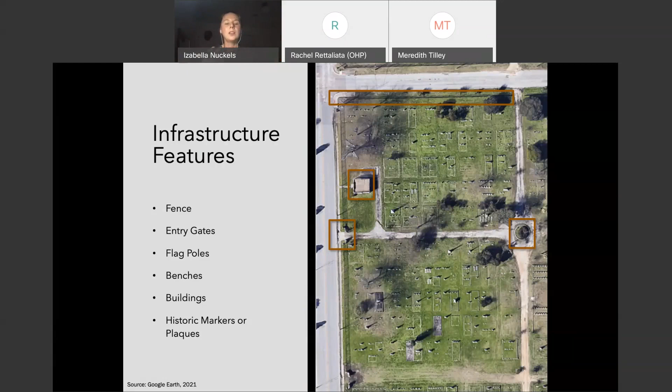And then kind of within the site, you'll have lots. So cemeteries may be organized informally, where you just have single graves. They may also be platted and organized in lots, like this cemetery is. Those lots may include members of a single family. They may include members of specific organizations. They may also be single graves.

Many lots have curbing around them, so that's basically just like a street curb. It's kind of a low fence. It's often made out of some kind of masonry or concrete. It may have decorative cornerstones or an entry step. There may be some kind of inscription describing who's in there, if it's a family or an organization. There are so many different types of lots, and we'll look at pictures of a couple of them.

If you look towards the bottom of the screen, there are a couple of lots that were totally covered with concrete, which is not uncommon either. They could also be fenced with cast iron or wrought iron fences. They may have historically been fenced with wood fencing that may no longer be there just due to time. So there are kind of so many different characteristics that you can find at the lots as well.

And then the lot also may have some ornamental features. So this is a page from a Sears catalog from 1904 that is describing a couple of the lot features that you can purchase: benches and urns that you can put in your family lot. This is an actual really nice faux bois ornamental bench at City Cemetery number 3 in San Antonio, and the whole lot has this really interesting kind of applied art, decorative art theme to it.

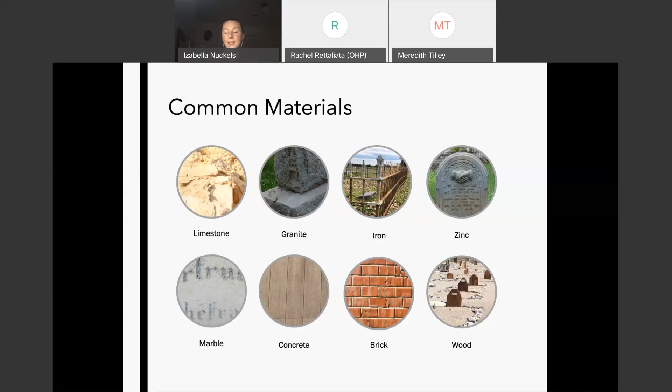So because I'm a materials person and I teach about materials, we're going to just go back to the basics and talk about what rock is. So rock is made up of minerals. So it's these things that are naturally formed in our earth. They're made up of one or more minerals. Minerals are these inorganic, naturally forming, really spectacular materials found in nature. Stone is a word that we use in conversation generally to talk about rocks that have been processed, or sometimes we call it dressed.

There are three main types of rocks. So you have sedimentary rocks. So these have been formed by compacted sedimentary deposits. They're usually found at kind of the bottom of ancient oceans. They sometimes have fossils because they're compacted deposits of crustaceans and ancient coral reefs. So this is our limestone and our sandstone. It tends to be very porous, but very easy to carve and abundant in central Texas.

Next up, you'll have metamorphic rocks. These are your marbles and your slates. And these are actually sedimentary rocks that have been recrystallized through elevated temperature or pressure. So they have similar qualities to sedimentary rocks, but are a little bit harder. And then lastly, you'll have your igneous rocks. So that's our granites and basalts and gabbro, and these were formed from magma that cools and solidifies.

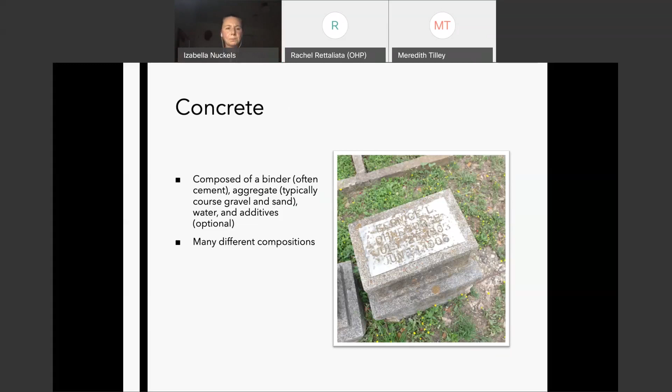So I mentioned zinc monuments. These were quote unquote called bronze monuments. That's how they were marketed. They were sandblasted to look like stone. As I said, zinc content is relatively high, so that makes the monument pretty stable. You'll see some of these when they get really tall, sometimes the seams will fail and they'll kind of start to sag a little bit because they're hollow on the inside. But in general, a lot of them are in really great condition, and the bases are usually zinc as well.

So when we're talking about these monuments, we're talking about kind of all of these different materials in the cemetery. It's important to kind of understand the basic construction. And a lot of times, different elements of monuments historically were made out of different materials. And so this kind of lends itself to different types of deterioration. It also may lend itself to specific treatments.

So, very generally, cemetery monuments have a die. So that's the kind of vertical piece that has inscriptions on it. And then it usually has a base of some sort. Sometimes dies are set directly in the ground, but often they're on a base. There also may be some kind of foundation. It's usually concrete that's either adhered to the base or kind of is a platform that's set in the ground, and then the base is set on top of it. So the die could be made out of any of those materials that we just talked about.

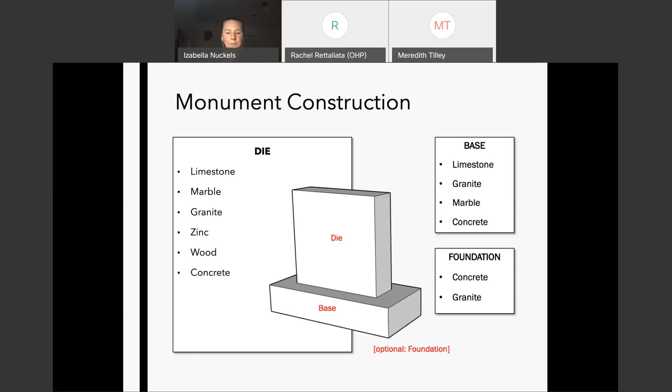We're looking into the construction. So you may have some monuments that are set directly in the ground. Footstones a lot of times are set directly in the ground, although they sometimes have bases. You may have a die on base. This is common with newer granite monuments where you literally have a big die that is set on a base, and you usually have some kind of mortar or caulking between the two to adhere them.

Historically, there were a number of monuments that were made with a pin between the base and the die. This helped with movement in the absence of having an adhesive of sorts in between. These pins historically were made out of some iron-containing material, so many of them have corroded because of moisture getting into that area, and they've corroded to the point where they've snapped or really failed.

And then you also may have a die-in socket, so the base may have a hole cut out in it, and your die fits right into that socket. It's a little slot. There's usually a perimeter around, and it was sometimes set in a lime-based mortar. That's a very soft mortar to keep it from moving around. Sometimes there were pins inside the socket that went into the die as well.

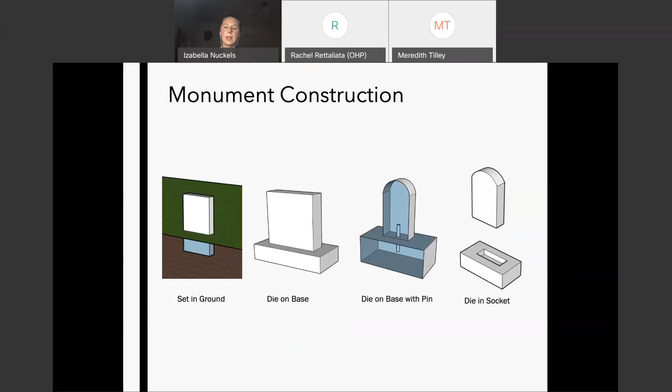And then, as I mentioned, there are so many different monuments in cemeteries. You'll have bedsteads, you'll have slabs, you might have mausoleums that are constructed like buildings. So there's a variety of different forms that you'll find, but those basic principles of stacking die on base, the pins, and the sockets are really the building blocks of construction in most cemetery monuments.

And then lastly, you'll have the inscription, and this also informs the type of treatment approach that you might have. This is an advertisement for the types of inscription that you can have from a 1906 Sears catalog. So you can have your sunken inscription that's incised into the monument. You can have raised inscriptions, and these are two examples from monuments in the City of San Antonio cemeteries as well.

And then I just want to reiterate that dies and bases were often made of different materials. One thing to remember about most building materials, but limestone and marble in particular, is that over the years, these materials move. They don't move a lot, but they move a little bit. As water goes in and moves out, these will expand and contract minute amounts. And so if you set them in a socket with Portland cement, in a very tight base, they can start cracking and not have the flexibility that they need. So you always want to use a lime mortar.

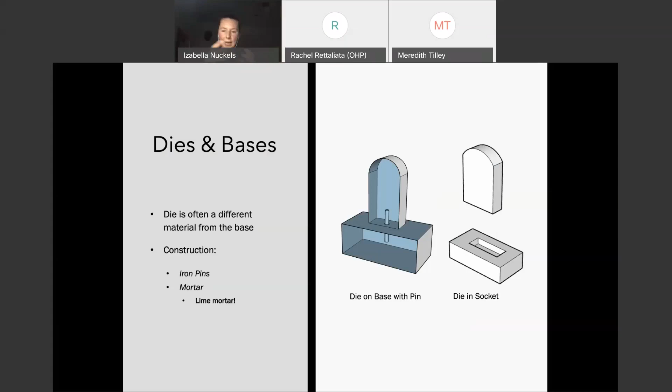If you have a corroded iron pin, you can replace those with an inert material like a fiberglass pin or a threaded nylon pin, something that's appropriate for long-term preservation, something that's not going to actively deteriorate in this exterior environment.

Some of our other site materials, of course, are metal fences. This is again from a Sears catalog. A lot of these metal fences around cemetery lots were prefabricated and ordered. They were often cast or wrought iron. They were historically painted, since iron materials corrode when exposed to air and moisture. So they're typically coated in order to keep them stable.

As you can see from the Sears catalog, there are a number of different installation techniques for metal fencing in cemeteries, and it's neat to go through some of these catalogs and see if you can identify where some of the fencing came from before you work on it. Sometimes it'll give you some clues on its construction or some missing elements that you might have.

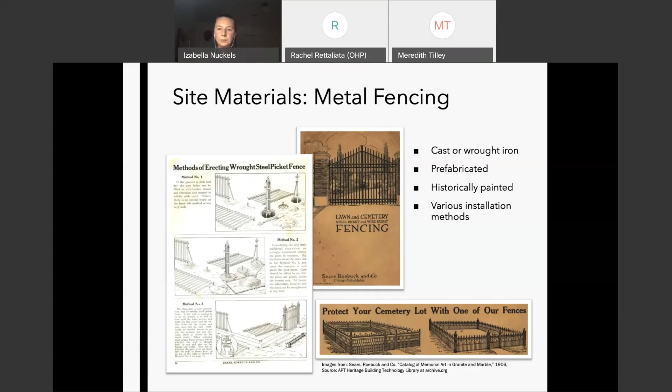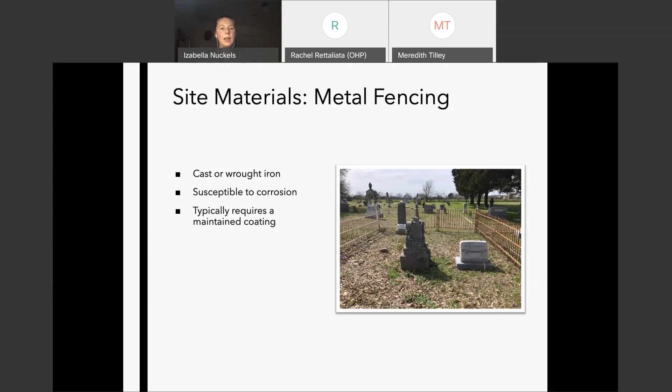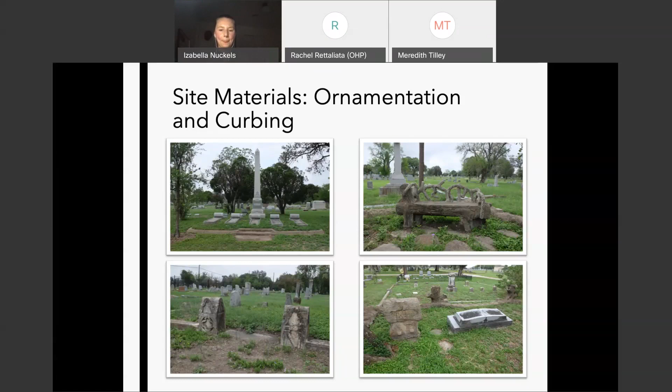So because all these materials are outside all the time, they're exposed to the elements, they're near roads, so they're exposed to pollution, they're around people, so they're exposed to people, there are animals and trees and weather going on. There's all sorts of different conditions that arise, and that's normal. So historic buildings, historic cemeteries, historic sites, historic resources, they don't stay in this like new state. They do require maintenance. That's part of what we do. It's part of how we kind of preserve our collective cultural heritage together.

So corrosion, as I mentioned, that's one type of deterioration that affects our metal materials. A lot of materials in cemeteries, including your fences and your pins, have iron-containing elements. So most of these elements are cast or wrought iron, which are alloys. An alloy is two or more different metals, or metal and a non-metal. And these alloys contain iron ore, which in nature, when you find iron ore, it's a very stable metal. But when you create an alloy of it, it actually is going through this process called oxidation when it's exposed to air and moisture, and it's actually trying to revert back to its natural stable state. So that's what this poor little iron ore is doing when it's corroding. It's just trying to revert back to its natural state, and it's just destabilizing in the process.

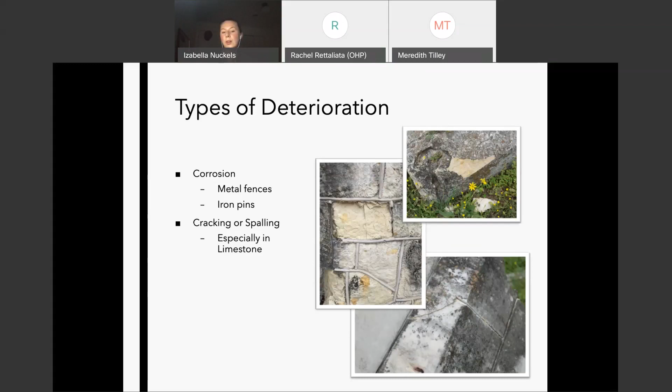Sometimes you'll see it due to human interaction, somebody bumps it, maintenance issues, things of that nature. So there are a number of reasons you may see that, but it's something to look out for when you're approaching any preservation projects.

And then you also might see biological growths. You might see them on the micro level, where you can visually see that color, but you really need a microscope to see what it is. You can see it on the macro level, where with the naked eye you can see this large plant growing. There are thousands of different types of biological growth, algae, lichens, molds. They grow in buildings, they grow in cemeteries, and some cause harm, some don't.

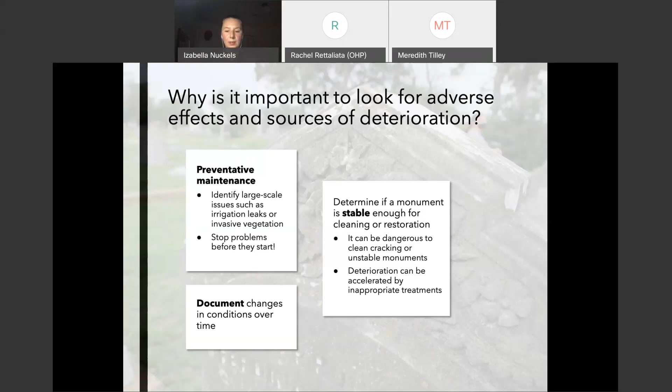So now we're going to talk about some of the best practices for cemetery preservation and how to approach a preservation project in a cemetery. And I was explaining this to Rachel and Meredith when we met, but a lot of cemetery preservation in these projects that we do, it's a lot like painting, where you spend most of the day taping off the room and preparing and picking out colors and doing mock-ups, and you spend a little bit of time painting, and then you take it all down and clean up and do all that.

So a lot of hands-on preservation involves preparation, getting all of your logistics in order. It involves documentation before you do anything, when you're testing product, after you're done doing it. You always want to use the gentlest means possible. So usually you're starting with low pressure water and then working up from there. You always want to use materials and methods that are appropriate for historic materials, historic fabric. So that may involve a little bit of research. It may involve ordering products. So it may take a little bit more time.

Safety should always be a priority when you're working in cemeteries. Cemetery monuments can be extremely heavy. I think that a cubic foot of granite is about 160 some pounds. So you really want to make sure that these monuments, that sometimes are just a die set on a base, are not unstable, and they're not going to hurt you or anyone that you're with.

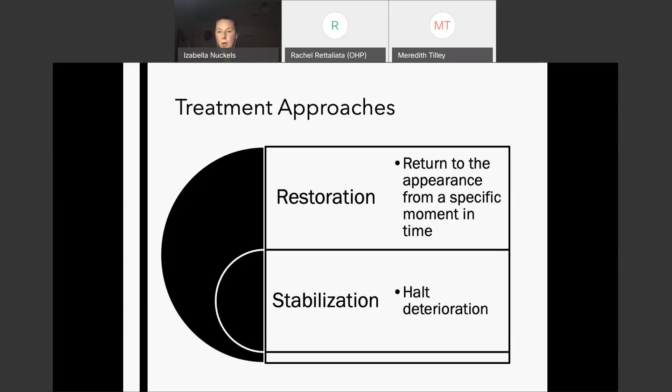So I'm going to go over some different types of restoration treatments, best practices, as well as some stabilization approaches. So some common cemetery monument restoration treatments that you may see are patching or infill. If you have a crack, or you have some kind of opening, this prevents moisture and water from infiltrating into the monument. It helps to stabilize it as well.

You may do adhesive repairs, so there are specific adhesives that are appropriate for different types of historic masonry. These usually have some water permeable qualities, so water can still move through the monument. You may be resetting dies in lime mortar beds in their base sockets. You may be doing more complex restoration, like pinning and casting new decorative elements and really doing a full restoration. So, you can go from those simple resetting dies into sockets to these very complex pinning, casting repairs.

As I mentioned, restoration projects tend to be pretty complex. They are usually multi-step processes. They usually start with cleaning and doing a condition assessment and sort of mapping out your treatment plan. They sometimes involve very simple repairs, but it really depends on the condition of the monument. Regardless, there are some best practices, some reminders for good restoration.

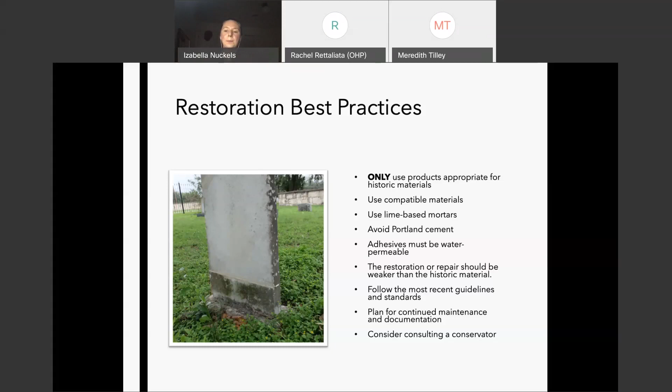And then, what happens if you use incompatible materials? So this is a question I get a lot. It seems easy to go to Home Depot and buy a product off the shelf, and it sometimes looks okay for a little while once you apply it, but there can be issues that arise over time. And, again, this is the image of that limestone that had Portland cement mortar applied around it that was just too hard, so the limestone is just falling away.

It was set in a limestone base with Portland cement, and likely when it moved a little bit due to natural ground movement that happens, it hit kind of an angle at which the die didn't have any kind of room to move, and so it snapped.

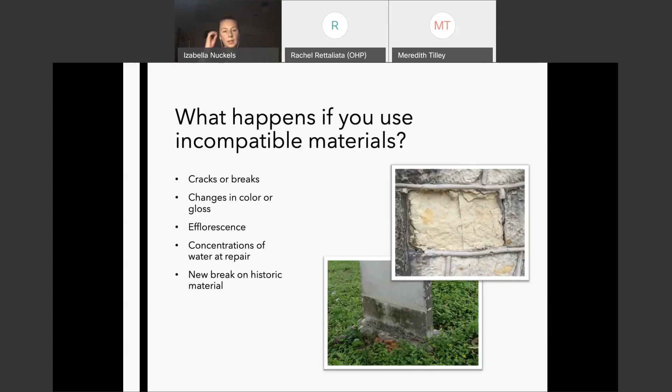So some stabilization approaches that you might have: you might be re-leveling or resetting, just to keep your monument still commemorating the person who is interred there appropriately, and also preventing it from damage from maintenance and other issues. Stabilization is where we're trying to halt deterioration and help to preserve and maintain our resource.

So you could be cleaning off soiling or biological growth or pollution. You could be replacing a corroded pin with a more inert material. You may be very carefully removing that macro vegetation, that really visible large vegetation. If you're doing that, you're doing it by hand, extremely carefully, so that you're not destabilizing the material.

And stabilization also involves maintaining coatings. Like on your historic fences, you may be applying a rust inhibitor and then applying a paint coating and maintaining that over time. So that's certainly a stabilization approach.

I wanted to talk briefly about monument cleaning, since this is what we'll be doing in our workshop. You always want to use the gentlest means possible when you're doing any cleaning. So you always test with water, see if water is effective, and then move up from that. You may have soiling, biological growth, or pollution-related soiling or crust on it.

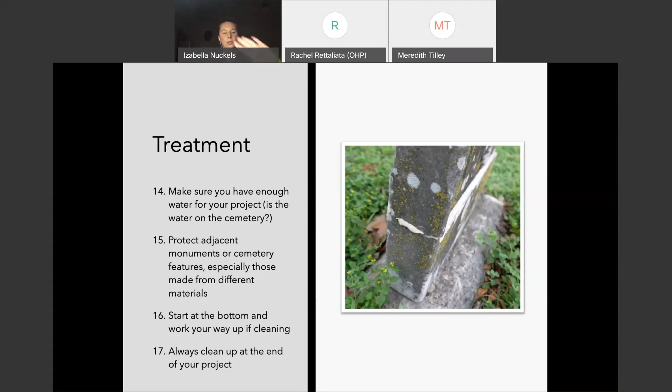When you're cleaning, one of the best practices is you want to start at the bottom and work your way up. And then, of course, when you're working at a public site, a historic site, you always want to clean up at the end of your project. You want to keep a tidy space while you're working, especially if you're working with mortars and things like that. You want to make sure that there's no debris left in the cemetery.

And then you're done, you've done a beautiful job, and you're going to document again, doing the same thing. You're going to add this after record with your first record so that everything is together for this one monument or object or structure. You're going to make sure these records are in an easily accessible location, labeled in a way that anybody can access them. You've considered your location-based system, but really, you've documented what you've done so that if somebody comes back 25 years later and wants to see what product has been used on this monument for restoration in the past, they can hopefully pull up your record, and that will help them better preserve this monument in the future.

I'm almost done, home stretch here. A couple of things to keep in mind when we're doing cemetery preservation: do no harm. Always select your gentlest means possible for your treatment approach. In general, the purpose of preservation is not to make historic resources look like new. Our purpose is really to maintain and stabilize these materials for the future, to allow these monuments to commemorate the people they were erected for, the people buried in the cemetery, and the past members of our community. So we're not trying to make something look like it did the day that it was set. We're trying to keep these resources within our cemeteries and within our communities for as long as possible. Always consider safety and documentation.